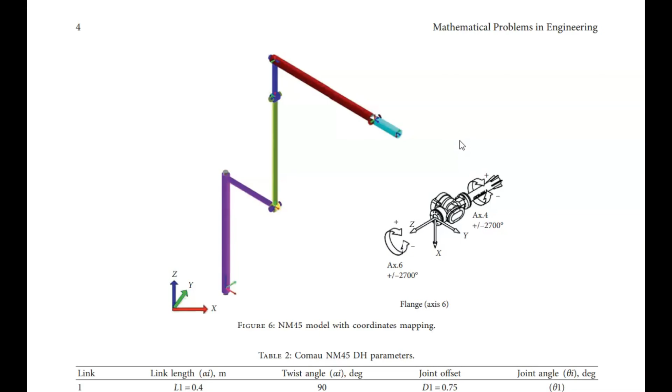If you've ever tried to study 6-axis robot kinematics before, or done a Google search on it, you usually end up looking at something like this that has some diagrams, some tables, gets into formulas, and before you know it you're looking at transformation matrices, and you just end up more confused than when you started. These are all usually written from the perspective of somebody who already understands it, so I want to try and make a video that explains it for the rest of us, at a beginner level.

So I'm a visual learner. I need to see the math, I need to see the problem worked out in front of me. So what I've done is I've put together this Excel spreadsheet where I have all the robot kinematics all worked out in front of me, and I can change the values and see everything change and see how the formulas all work their way through.

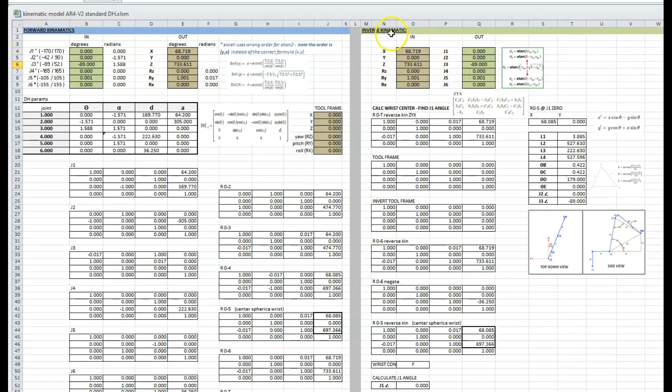So to illustrate the difference between forward and inverse kinematics, I have the AR4 control software open here, and then I have a camera set up on the robot so you can see it move.

The forward kinematics are when I know what the joint angles are, but I don't know what the Cartesian coordinates are for the XYZ, yaw, pitch, and roll position of where the end effector is out in space. So as you can see here, when I jog the robot using joint mode, changing the joint angles, the forward kinematics calculates out and tells me what the XYZ, yaw, pitch, and roll position of the robot is. You can see every time I jog it, the Cartesian coordinates update there.

Now the inverse kinematics is the opposite. That is when I know what the Cartesian coordinates are, but I don't know what the joint angles need to be to make that happen. So when I jog in the Z direction, for example, if we jog straight up, the inverse kinematic calculation is what figures out what the joint angles need to be to make that move happen. So every time I jog in Cartesian, you can see the joint angles updating. That is the inverse kinematic calculation that makes that happen.

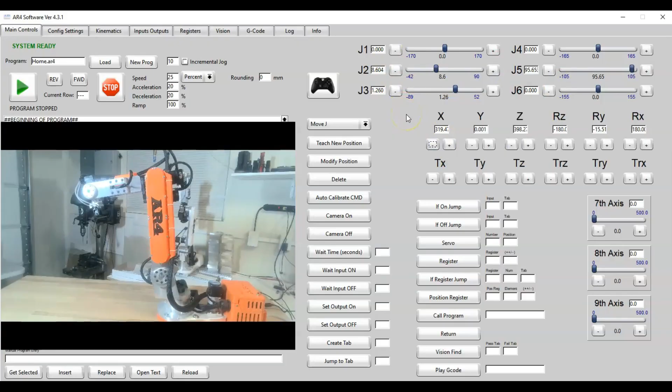So now that we know the difference between forward and inverse kinematics, I'm back on the spreadsheet here just to show you a few things and how the spreadsheet works. On the left side is the forward kinematics like we talked about before, and up here in these cells in green, this is where I can input the joint angles, and this will output the Cartesian coordinates.

So when I know the joint angle, for example on joint 2, if I change that to 20 degrees and enter that, it calculates through all of these transformation matrices and then spits out what the Cartesian coordinates should be.

Now on the inverse kinematic side, it's the same thing. You can input in what you know the Cartesian coordinates need to be. It will run through all these calculations and spit out what the joint angles need to be.

So to illustrate this, for example, I could take and copy the values from those fields and then paste in the values, and you can see it updates, and now it spits out what the joint angles should be. So you can see right here, J2 just updated to tell me that to achieve these Cartesian coordinates, joint 2 should be changed to 20, which is what we put in over here.

So now we're going to really get into the forward kinematics and how the forward kinematics works, and we'll do the inverse kinematics later towards the second half of this video.

On this side, for the forward kinematic calculations, you can see there's a lot of formulas here, a table of parameters, and a bunch of transformation matrices.

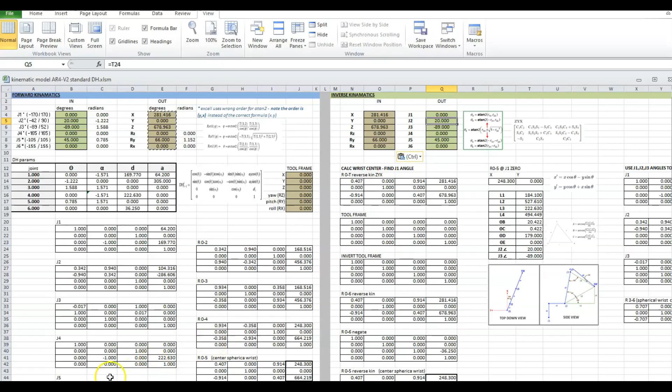Before we get into all that, let's talk about what we actually need to do to calculate the forward kinematics, to take each known joint angle and calculate where the end effector is in space.

We need to know the difference from where the base is to where joint 1 is, not only the difference in rotation but the difference in distance. Then we need the change in distance and rotation from joint 1 to joint 2, and the change in rotation and distance from joint 2 to joint 3, and so on.

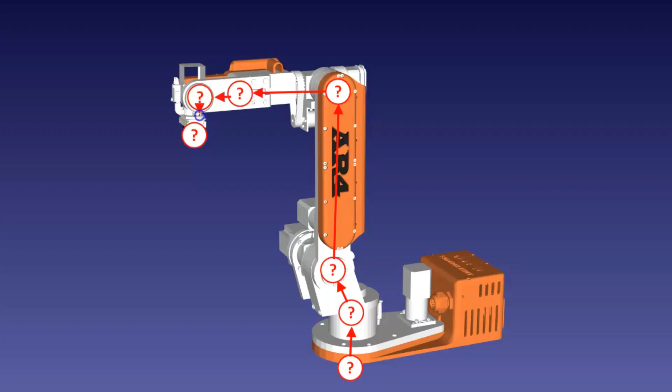So what we need is some type of mathematical representation of the change from the base to joint 1, the change from joint 1 to joint 2, and so on throughout the entire robot, so that we have a definition of the translation from one joint to the next.

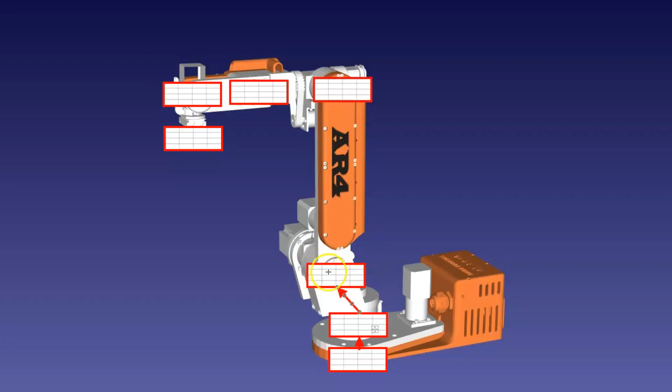That is what a transformation matrix is. This matrix defines the rotation and position of the base. The next one, for joint 1, defines the difference in position and rotation from the base to joint 1. Then this matrix defines the change in position and rotation from joint 1 to joint 2, and so on—each matrix defines the change from one joint to the next.

Once we have all these matrices built, we can multiply this matrix times this matrix times this one times this one, going through the entire kinematic chain, so that once we're done multiplying them all out, the last one gives us information we can extrapolate into the Cartesian coordinates of this position in space.

Now this sounds pretty daunting and complex, so we're going to take about three steps back and talk about some basics of rotation and translation.

When I reference a transformation matrix, or what's known as a homogeneous transformation matrix, this is a 4x4 matrix—a block of 4 rows and 4 columns where we place all our numbers. This is a notation, a form factor for linear algebra, that lets us do linear calculations on these numbers.

So this 4x4 matrix encompasses numbers that represent rotation and translation—that is, the yaw, pitch, and roll, plus the displacement in x, y, and z. The first three columns and rows in the matrix handle the rotation, and this is what's known as a rotation matrix.

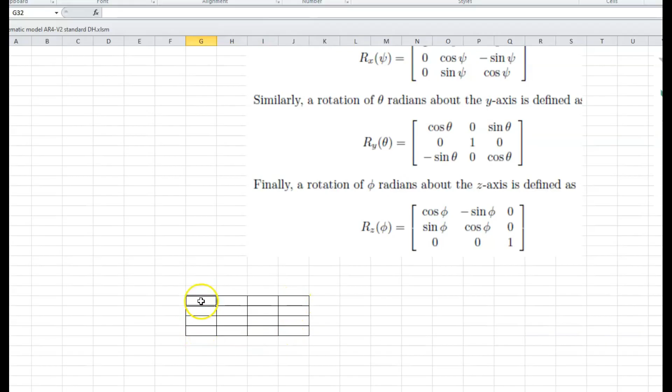When you think of rotation, you're probably used to Euler angles—the yaw, pitch, and roll. In linear algebra, a rotation matrix is just a transform matrix that allows us to perform rotation in 3D space.

This linear algebra or matrix format can be a little confusing. Linear algebra is a big topic, and there are a lot of websites that go over it, like betterexplained.com, which has an intuitive guide to linear algebra explaining how algebra means relationships, and linear algebra means line-like relationships. I'll put a link to this website in the description.

This article goes through some examples, gives equations, and explains how these linear calculations are done, and how they can be put into a different notation—a matrix notation—and how different operations can be performed across these matrices. It's a good article.

There's also, on Khan Academy, a lot of good videos—one on Vector Intro for Linear Algebra that explains how a vector can transform into the linear algebra matrix notation. So there's some good info out there to help you grasp the concept of linear algebra.

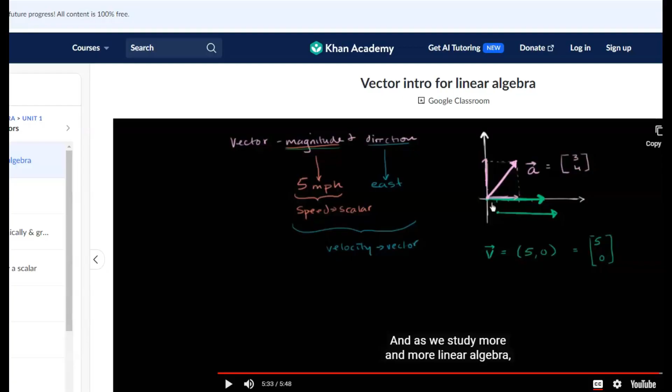In this example, we're gonna do 3 degrees for the Z, 10 degrees in the Y, and 5 degrees in the X. So before we can do this, we need to convert these to radians.

And so you might ask, well, what are radians and why do we use radians instead of degrees? Degrees are something that was more of a cultural thing, I'm not sure what the history is on how we came up with 360 degrees on a circle. There's a few different theories on that, but it's not a very mathematically sound way to define an angle. So we're going to use radians.

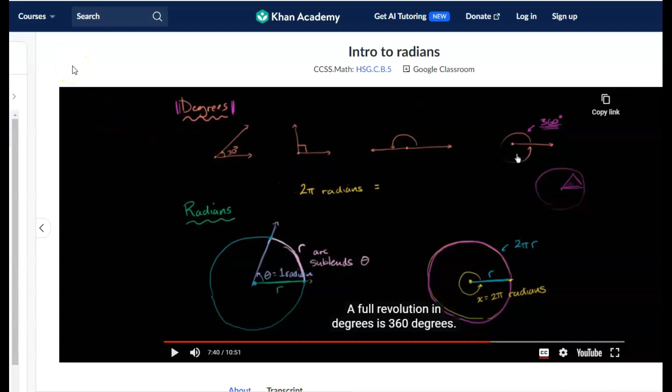So going back to our example, the first thing I want to do is convert 3 degrees to radians. So I'm just going to say that this equals radians of this cell. And so that's what the radians of 3 is, and then we can just pattern that down. So now we have the radians available to us for each of those angles in degrees.

The next thing we're going to want to do is take and pattern this formula over to where we're going to work this out. You'll notice that we have cosine, sine in these first 4 cells, and then these are zeros and ones. So we want to just pattern or copy that over. So I'm just going to put a 0, 1, 0, and a 0.

In this first cell here, I'm going to take the cosine of our Z angle, which is this. So we're just going to say equals cosine of 3 degrees radians, and that's our value for this one. This one, we're going to say equals negative sine of 3 degrees radians. For this cell, we're going to say that this one is equal to sine of 3 degrees radians. And this cell is equal to cosine of 3 degrees radians.

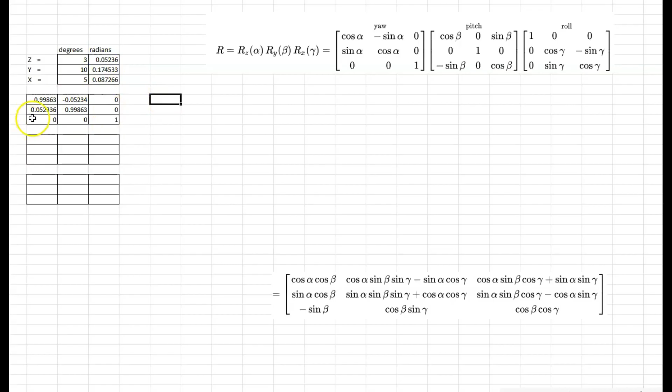So now we have a rotation matrix, and this rotation matrix represents in matrix form the rotation in Z of 3 degrees. So now I'll go ahead and do the same thing in these matrices for the Y rotation, and then the same thing for the X rotation.

Okay, so now I've finished filling in these last 2 matrices for the Y and the X, basically following the same thing we did on the first one. I just copied in the zeros and ones into each of these, and then applied the cosine and sine as shown here to these cells. So now I have 3 rotation matrices: this one for the Z angle of 3 degrees, this one for the Y of 10 degrees, and this one for the X of 5 degrees.

So now if we want to start working on creating a rotation matrix that encompasses all 3 rotations into one matrix that contains a complete rotation of 3, 10, and 5, of that complete rotation in one matrix, we can start with matrix multiplication. And what we're going to do is we're going to multiply the Z matrix by the Y matrix, and I'm going to put that right here in these cells here.

What that will give us is a matrix that represents the rotation of the Z and the Y, and then we'll take this matrix and multiply it by the last one, by the X, and then we'll put that here, and that will give us a matrix that encompasses or shows the complete rotation of all 3 angles right there.

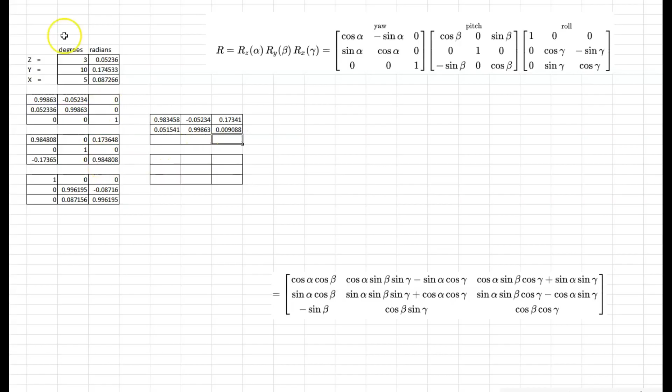This one is going to be equal to second row times third column plus second row times second column plus... Okay, so I finished filling in this bottom row here.

So you can see if we click on each of these, you can see top row, first column, top row, second column. Click on that, you can see it highlights top row, third column. Then we can look at the bottom one that I finished. Bottom row, first column, bottom row, second column, and bottom row, third column. So that is how you do matrix multiplication manually.

Excel has a formula for doing it automatically, and just like any other programming language, Python or whatever, is going to have a math library that'll do it for you. But I wanted to show you how it's done so that you understand it. So I can highlight a 3x3 space of 9 cells, and I can put in equals and then MMULT for matrix multiplication, and I want to duplicate what we did here just to verify that we did it correctly.

So I will highlight the Z matrix, and we'll put in a comma, and then highlight the Y matrix, and end the brackets. And then in Excel, for the matrix multiplication to populate all 9 cells, you have to hit Control, Shift, and Enter. So now we can look at it and we can see that it verifies that I punched everything in manually correctly. So I just wanted to show you that.

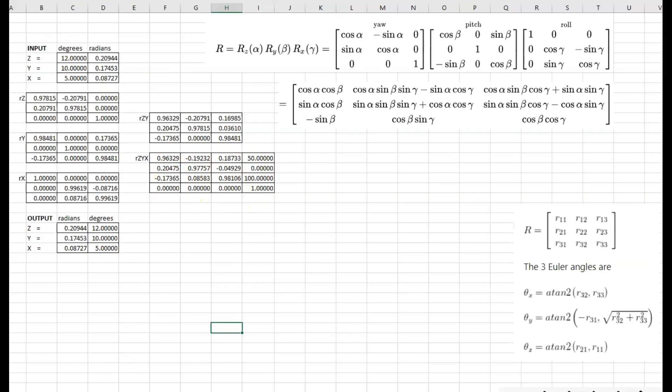So there's a little more to it. We'll come back to this, but I just wanted to point out that this is going to start to make a little more sense now that we're getting through what the transformation matrix looks like right here. So now let's talk about what it's actually going to take to create a transformation matrix for the robot. So we will need to create one for every single joint. So let's do an example of creating the transformation from joint 1 to joint 2.

So I've got my robot here. Let's say that this is my frame for joint 1 and this is my frame for joint 2. The z-axis is kind of hidden inside here for joint 1. So let's say that's our z-axis, and our y-axis goes along there, and the x-axis is pointing straight out. So in order to make the translation from this frame to this frame, I would have to rotate this frame 90 degrees about the x-axis to make these two match. So I've got a 90-degree rotation there.

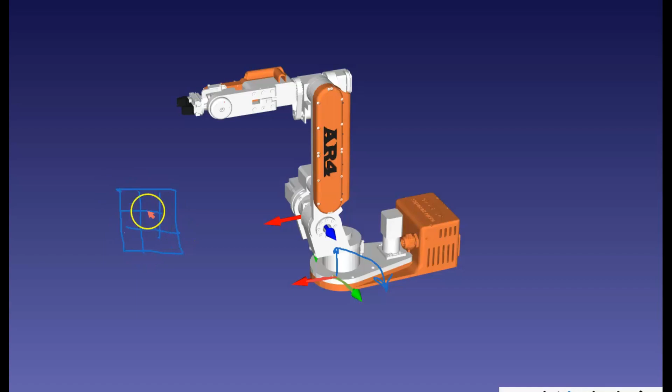So I would have to create a rotation matrix and put in all the values for a 90-degree rotation in the x-axis. And then, for example, our joint variable, let's say our robot moved 20 degrees on joint 1, then I would need to also create a rotation that indicated a rotation of 20 degrees in the z-axis. So I'd have to multiply those together, and then I would have an overall rotation of 20 in the z, 90 in the x. So let's say this is our rotation matrix, and then we would also make this a transformation matrix, adding the other cells that we need.

So let's say from our earlier example that the translation from joint 1 to joint 2 is 50 millimeters in the x, 0 in the y, 100 in the z, and then we'd add a 1, a 0, a 0, and a 0. And so that's how we would create a transformation matrix going from this frame to this frame. So we would have to do that throughout the entire arm. There's a bit of math in there; it takes quite a few steps. It takes 6 parameters to make that transformation. So most people don't do it like this. They use a shortcut called the Denavit Hartenberg parameters, and so that's what we're going to talk about next.

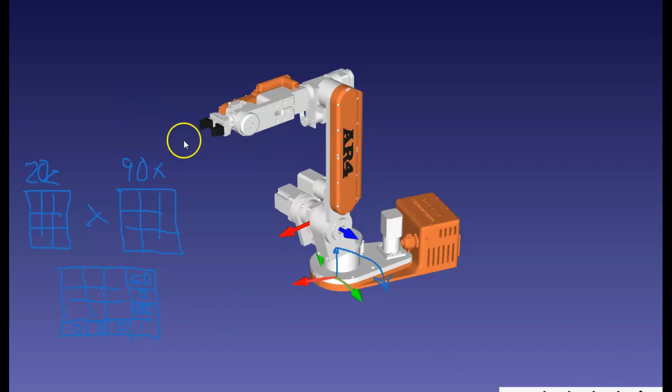So the Denavit Hartenberg parameters, or DH parameters, were created back in 1955 by Denavit and Hartenberg. And what these are is a shortcut or a formula to be able to create each of these transformation matrices a little bit easier, using only 4 parameters instead of 6. So the DH parameters are also used in conjunction with the DH table. So we've got a table here of 4 parameters per joint.

So before we get into that, there are 4 rules that you have to follow for the DH parameters to work. And these rules are: number 1, the z-axis has to be the axis of rotation. So if we look at our robot here, I'm going to use joints 1, 2, and 3 as examples. So in joint 1, the z-axis, the blue axis here, that is the axis of rotation.

On joint 2, the blue line there, that's the axis of rotation on joint 2. And the same thing on joint 3, the z-axis is the axis of rotation there on that joint. So the second rule is that the x-axis must be perpendicular to the z-axis in the frame that we are coming from and the frame that we're working in.

So looking back at our model here, the x-axis has to be perpendicular to the axis we're coming from and going to. So using joint 1 for an example, the x-axis has to be perpendicular to both the z-axis for this joint and for this joint. So you can see that by the x-axis coming out in this direction, that satisfies that rule, that it's perpendicular. And then you can see here on the next joint, joint 3, that the x-axis, by having it point straight up, it is perpendicular to both of the z-axis from both the joint that we're working in and the previous.

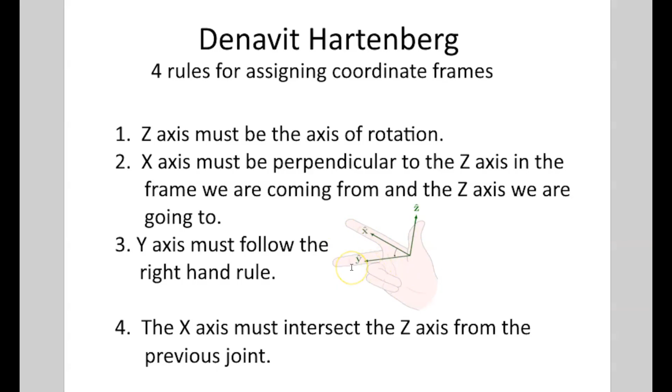The third rule is that the y-axis must follow the right-hand rule. So if you're not familiar with the right-hand rule, if you hold your hand in this orientation shown here, your thumb is the z-axis and the x is your index finger, then the y-axis has to be coming out in this direction to the left, as shown here by your middle finger.

So we can see here on the model, if the blue arrow going up is my thumb and the red arrow is my index finger, that would make my middle finger coming out to this direction, the direction that the y-axis needs to be. The same thing here, if this axis coming straight out was my thumb and this was my index finger coming straight out, then that puts the y-axis coming straight down. And then in this case here, if this was my thumb in this direction and this was my index finger pointing out, that puts the y-axis in this direction.

And the fourth rule is that the x-axis must intersect the z-axis from the previous joint. So if we look at the x-axis for joint 1, if we just do an imaginary line that goes to infinity in both directions, and then we look at the z-axis for the previous joint, and it goes to infinity in both directions, they do intersect right here. So they're on the same plane.

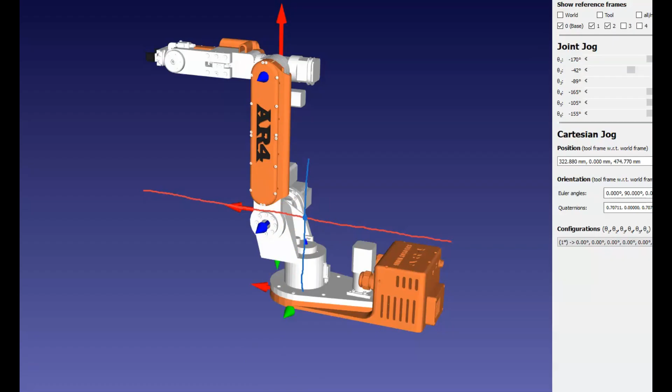Basically, the only time this really causes a problem is if you have an offset joint. If joint 1 was offset to one side, you would have to create your frame for your robot and define it with the frame offset so that these intersected, to satisfy the fourth rule of the DH parameters. So as long as we follow those 4 rules, we can set up our robot or configure our robot in a couple of different ways.

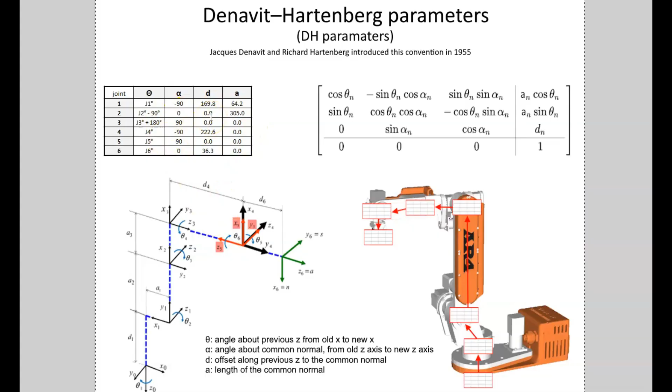I mean, not only are robots going to be different from one another as far as their size and the length of the arms, but you can also change the way that the joints are oriented to each other, at least as far as where 0 degrees is at, and some of the configurations. So, for example, if we open up an ABB robot, we can see that with all the joints at 0 degrees, the robot is in an L configuration.

But if we open up, let's say, a KUKA robot, you can see that with all the joints at 0 degrees, the robot is laid out flat like this instead of an L configuration. So KUKA has made their robot a little bit different as far as where 0 degrees is at. By the time you're done doing all the math, going through all the transformation matrices, you're still going to end up with the correct value at the end of where the end effector is. They just have a little bit different configuration.

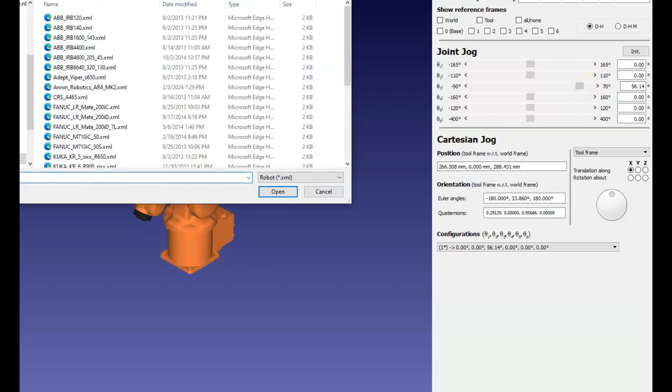Then, for example, if we go back to the ABB robot, if we jog joint 3 in the positive direction, that brings the arm down. Now, let's look at a FANUC robot, and we jog J3 in the forward direction, that brings it up. So they've defined their frame a little bit differently. So that's kind of an example of how you can still follow the parameters, but you can set up each robot a little bit different. So you will see tables that are set up differently.

So let's look at the table for the AR4. This first column, this is theta. So this is defined as the angle about previous Z from the old X to the new X.

So basically this is your joint angle, theta, this is your variable. So when you jog your robot, if you jog joint 1, this is the value that's going to be changed before you run the calculation on where the Cartesian coordinate is for that joint position.

You can see here that J2 is J2 minus 90 degrees and J3 is J3 plus 180. These make it so that with all the joints at 0, the robot's in the L configuration, same as the ABB robot we saw earlier. The KUKA will have different values - it won't be minus 90 and plus 180 here. There'll be different values added to or subtracted from the joint values for that particular configuration.

But that's what the theta column is, the joint angle basically. The alpha column is the angle about the common normal from the old Z to the new Z. If you remember in that previous example where we had to rotate the frame 90 degrees, that's what this is - how the main frames are rotated from one another, from the old Z to the new Z, about the x-axis. So in this case, from the base frame to joint 1, it's a negative 90 degree rotation, then 0, plus 90, minus 90, plus 90. Different robot configurations, depending on how they've set up the robot, these numbers could change some.

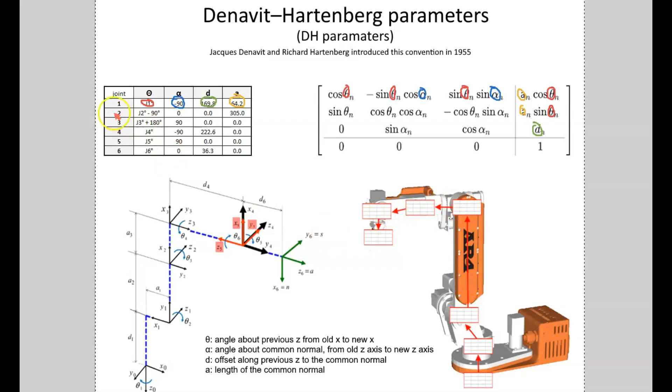And that basically creates our transformation matrix. So basically that's all there is to it, is just plugging these values in and creating each of the 6 matrices for each of the 6 joints.

Okay, so now that we've gone over how to create transformation matrices using the DH parameters, let's go back to our spreadsheet and go through the entire forward kinematic side. This entire side should now make sense to us. We've got our input up here, where we input what we want our joint degrees to be.

This column just takes that and transforms it to radians, so this whole column is just the radians of the cell next to it. In our DH parameter table, we've got our theta, or joint value, for joint 1, which is just grabbing directly the radians. The second one for joint 2 is grabbing this value minus radians of 90, and if you recall earlier, that's how we defined our frame setup for joint 2. Joint 3 is the joint 3 value plus radians of 180 degrees, just like we had here, and so on. Each of these just grabs the radian values.

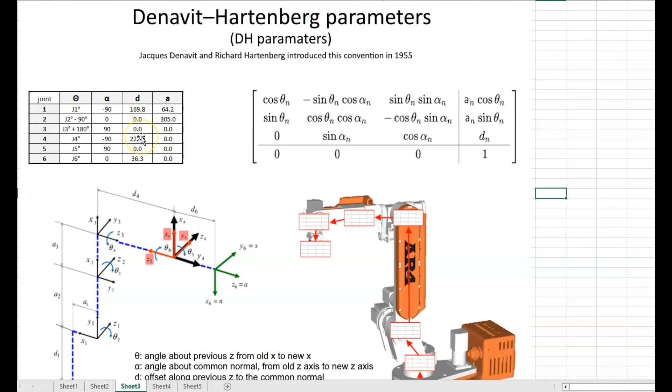Then for our alpha, this one is radians of minus 90, 0, plus 90, minus 90, plus 90, and 0, which is what we had here for how we defined our robot frames. And the D value and A value are link lengths, the same as what we talked about earlier here. So this is our DH table that we've built.

Now here we have our transformation matrices for joint 1. If we look at our formula, which I've got right here, it follows this formula all the way through, the same formula we looked at on this sheet. It's the exact same formula. For example, this first value is cosine of theta, same as we see there. This one is negative sine of theta times cosine of alpha, the same thing we have here. Every one of these is just an exact copy of this formula, grabbing the values from this first row for joint 1.

This one down here, joint 2, is the same thing — it just grabs the values for joint 2. Joint 3, joint 4 grab the values from the 4th line, and so on. So every one of these, 1, 2, 3, 4, 5, and 6, are exactly the same, following that formula.

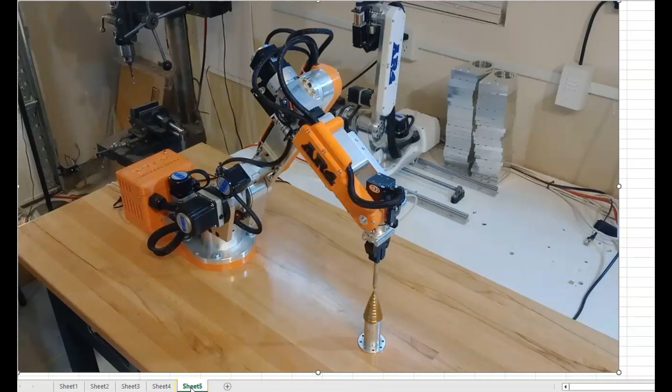Now what I haven't talked about yet is the tool frame. What I've created here is a tool frame. If you recall from the first scene in the video, the robot was articulating about this pointer. The tool frame lets you define how long your tool is, so you can do things like this. Tool frames are used in all kinds of applications — for weld guns to define where the tip of the welder is, glue applications for the end of the glue gun, and it can be anywhere you want in X, Y, and Z, pitch and roll, based off the frame of the end effector.

In this case, this one was 120 millimeters straight out in the Z direction, and that's all I did — defined my tool frame to be 120 millimeters. If we go back here, I basically created this tool frame manually, the same way we created this rotation matrix, and then turned it into a homogeneous transformation matrix. So these rotation cells, if we look at the first one, are the exact same formula as right here, following that same template.

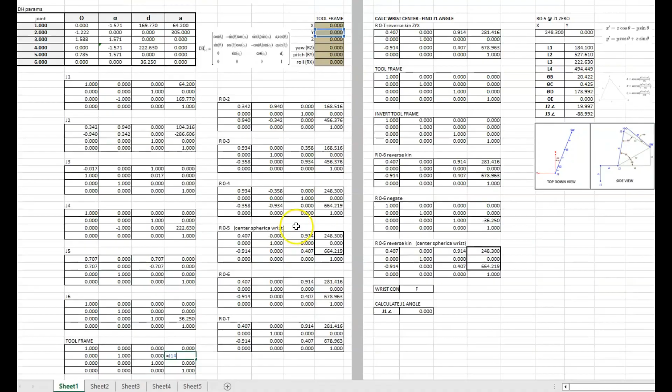And the inputs for these I put up here — this is my input for my tool frame. These are the input values it's looking at to create this. For example, the Z value is looking at the Z value here, and the Y value is looking at the Y input. So this transformation matrix is just manually created from this input right here.

So, for example, the tool we showed you right here — if I wanted to apply that, I'd come in here to the Z, put in 120 millimeters, and then if we look at our tool frame, we've got 120 millimeters. Basically, this tool frame just stacks one more transformation onto the end of our robot to tell us where the very tip of that tool pointer is. So we've got all 6 joints, plus an extra transformation matrix to tell us where the tip of our tool ends up.

So now I have 7 transformation matrices, and all we do is multiply those through each other. This first one, R02, is joint 1 times joint 2. The transformation matrix for R03 is R02 times joint 3, and the product of that times joint 4 gives us R04. R05 is R04 times joint 5. So you can see all we're doing is multiplying the product of the previous multiplications times the next joint.

R06 is R05 times joint 6, and then R0T, our last one, is R06 times our tool frame. So this frame is our final output, the last frame that tells us what we want to know.

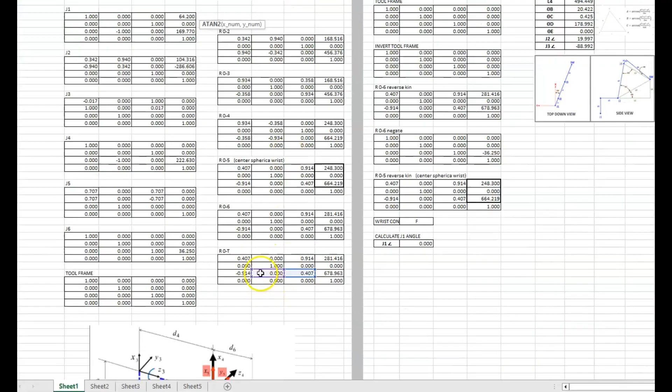Then we have this formula for extracting the yaw, pitch, and roll in degrees from that frame. This ATAN2 goes through and grabs ATAN2 of those 2 cells. The rotation in Y grabs the ATAN2, and this same formula grabs it from those 3 cells from the rotation portion of that matrix. Then this ATAN2 formula grabs those 2 cells from this portion of the rotation matrix and presents the radian values, and then converts those to degrees, telling us the final degrees of where the robot is at.

So that completes the forward kinematics and how the forward kinematics on the robot works. So just a quick recap here.

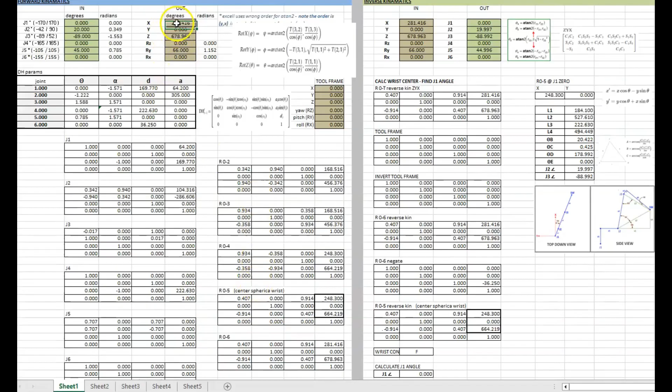We've got our DH table that defines basically what our robot looks like. Those values are run through this formula to create each of these frames for each joint, all the way down through the tool frame. We multiply this one times this one to get this one, and this one times this one to get this one, and so on all the way down until we have a final transformation matrix. Then we extract the XYZ and use those formulas to extract the yaw, pitch, and roll from the rotation portion of that matrix to spit out what the final values are.

And again, to recap what the forward kinematics do: when I set these joint values, this is how the software figures out the XYZ, yaw, pitch, and roll positions of the robot.

So in the next half of this video, we're going to go over the inverse kinematics, or reverse kinematics. That is where we know what we want the X, Y, and Z to be, but we need to figure out what the joint values are, so we'll do that next.

Now let's talk about the inverse kinematics, or reverse kinematics, of the robot. On the spreadsheet, on the right-hand side where we've got the green bar across the top, this is where we've done all of the inverse kinematic calculations. These cells are where we input what we want our Cartesian coordinates to be. It'll run through all the calculations and spit out what the joint angles need to be to achieve that. So this is our input on the sheet, and this is our output on this side.

Now, there are a couple different ways to do inverse kinematics: a geometric method and an algebraic method. We're using the geometric method. I think that's the simplest and easiest to understand.

Keep in mind that this calculation is the simplest form of geometric calculations, and it's based on this robot's configuration, with all joints at 0 and the robot in an L configuration, so that's what this is written for. The kinematics can get a lot more complex when you're putting in conditions for different robot configurations and things of that nature.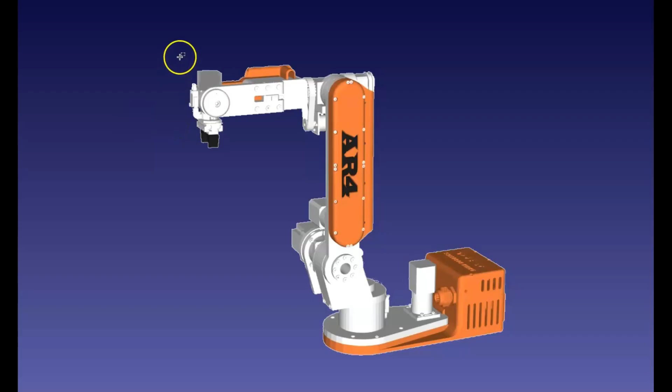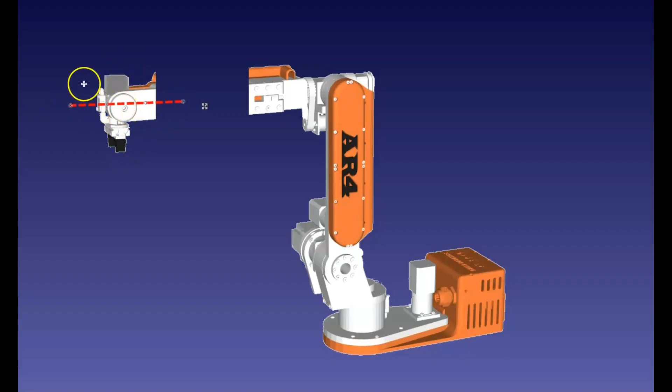The concept here is that mathematically, we're going to take the robot wrist and detach it from the robot. On the wrist we have 3 axes: axis 4 spins along that axis, axis 5 spins along this axis, and axis 6 spins along that axis. All 3 of these joints intersect in one spot in the center, and that's known as the spherical wrist. That's the center of J4, J5, and J6.

These 3 joints provide all the orientation for the end effector. If we imagine the spherical wrist is out here somewhere, and we look at the configuration from the spherical wrist back to joint 3, from joint 3 back to joint 2, and from joint 2 back to the offset and joint 1, more or less what we end up with is a triangle. These 3 joints primarily dictate position in the world. So joints 1, 2, and 3 dictate position, and joints 4, 5, and 6 dictate orientation.

This allows us, from our Cartesian point in space, once we figure out where the spherical wrist is, to run some trigonometry against these lines and figure out pretty easily what joints 1, 2, and 3 are. Then from there we can work backwards to figure out what the orientation of the wrist is.

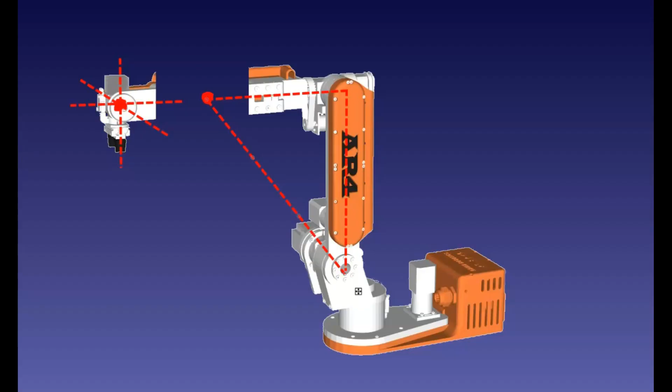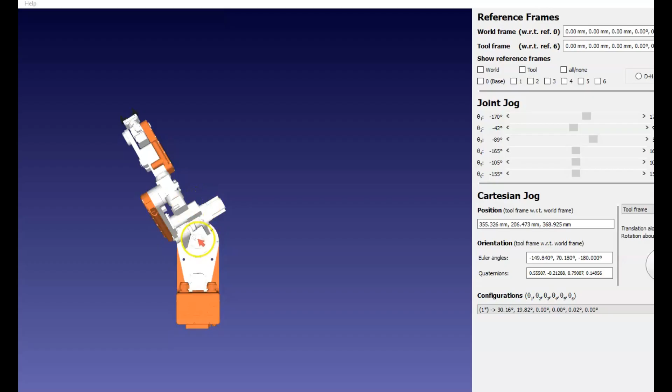Let's say we want to start with joint 1 and figure out what the joint 1 angle is. Looking at a top-down view from the robot, let's say joint 2 is leaning forward about 20 degrees, and we want to move joint 1 about 30 degrees, and figure out that angle from the geometry. We look at the axis from joint 1 over to where our robot is, to figure out the angle of joint 1 — going from our end effector to right here is the angle we want to find.

But what I want to illustrate is if I jog joint 5 down and move joint 4 over, now my end effector is over here, and I'd actually be getting the wrong angle. That's not truly the angle of joint 1 — it's the angle of joint 1 plus the offset of how our wrist is oriented. That's one reason we need to figure out where the center of the spherical wrist is before doing any calculations, so we get the angle from the spherical wrist over to our zero line correctly.

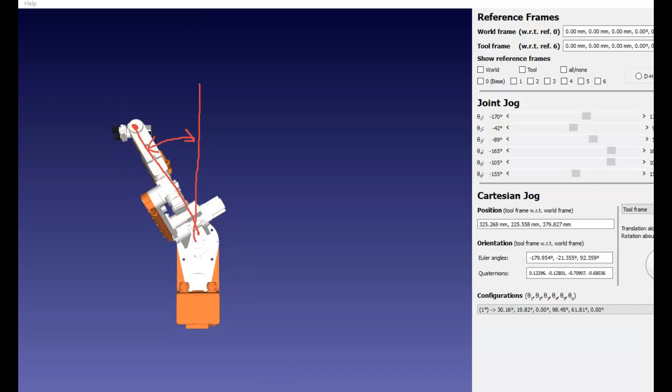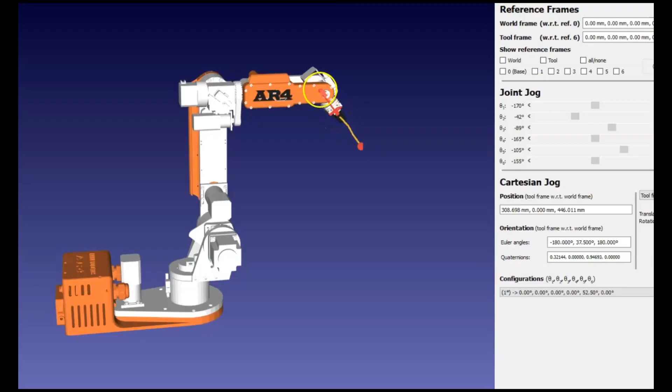So we need to figure out where this spherical wrist is. We have the XYZ, yaw, pitch, and roll for where the end effector is. Let's pretend we have a tool attached to our robot, like a pointer or a weld gun. The kinematics — the XYZ, yaw, pitch, and roll of the robot — is right here, and we need to work backwards up to the spherical wrist to figure out its XYZ, yaw, pitch, and roll. We work from the end of the tool back to the end effector, and then from the end effector back to the center of the spherical wrist. Once we get to that point, we can start calculating joint angles for joints 1, 2, and 3.

So now we're back on the spreadsheet looking at the inverse kinematic side, and we need to work our way back from the end of the tool back to the center of the spherical wrist. So what we know right now is the XYZ, yaw, pitch, and roll of where the end of the tool pointer is. The first thing we want to do is turn this into a transformation matrix.

Looking here at this first one, this is R06 plus T plus the tool. We're going to build this rotation section first, just like we went over in the first half of the video where we learned how to create a rotation matrix from the yaw, pitch, and roll. We're using this exact same formula here, and I have a copy of it right here. This is the same formula from earlier.

So we're just going to plug all these numbers in, the yaw, pitch, and roll, into this formula and build this rotation. This will give us, in matrix format, the rotation of where the end effector or the tool currently is. Then we simply copy in the x, y, and z values, directly linked. So we have the x, the y, and the z values, and then, like before, 0, 0, 0, and 1 to complete this transformation matrix.

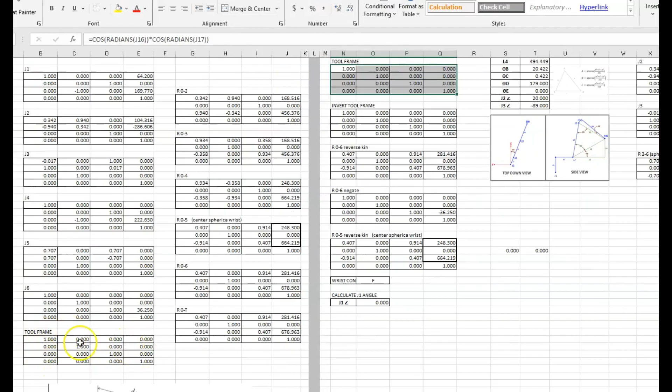This is exactly the same as what we looked at earlier on the forward kinematic side. This tool frame is exactly the same thing. I just thought it would be easier to follow if we had it in both places so that we could follow the math all the way down through.

So this is simply just a tool frame, and if I put in a value up here on the input, it's going to affect and manipulate this frame or this transformation matrix the same as before. So if I was to put in 100 in the Z, you can see it puts in 100 in the Z, and so on. So this is just our tool frame, and now since we're working our way backwards from the tool frame, we need to be able to invert that tool frame.

So we need to create an inverted version of that tool frame. One thing to keep in mind when creating an inverse matrix is that when you multiply the original matrix times its inverse, it should equal the zero rotation or the identity matrix, and that's what it already is because I don't have any values in here.

But if I was to give the z value some value, you can see the z value is negative 100 on this frame and positive 100 on this frame. So if we're to multiply this frame by this frame, the output should be the identity matrix or a zero rotation matrix. So that's something to keep in mind when you're inverting a matrix.

There's a lot of software tools out there to handle creating an inverse matrix. To actually invert a matrix manually is very mind-numbing; it would take about an hour-long video to go through, and there's a couple different methods for doing it. But given that this isn't just a standard 4x4 matrix in linear algebra—this is actually a transformation matrix with a rotation portion and a displacement portion—there's a trick or shortcut to quickly turn this into an inverted version of this matrix up here.

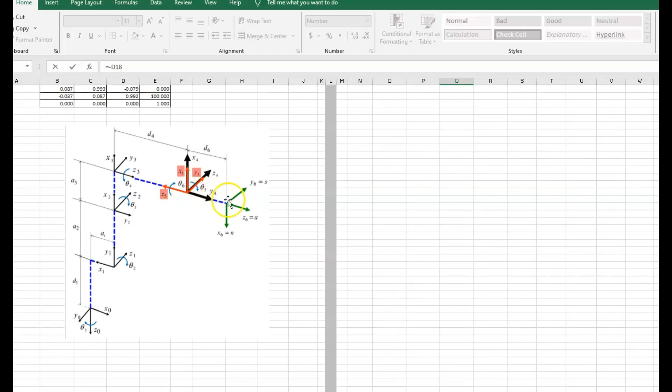So this D value, this D 36.25, if we go back and look at our model right here, this D6 value is the value that goes from the end of our end effector back to the center of the wrist there. So that's what we have right here, is that value negated. We've got a negative

36.25 on the Z portion of this, and then for our final transformation matrix, that is just the previous R06 frame. This is the frame we got after we went backwards from the tip of the tool back to the end of the joint 6 end effector, and then we multiply that times the negation of that arm length, and that's what gets us to the center of the spherical wrist. So this frame now represents the center of the wrist. This XYZ, this is the position in space where that is.

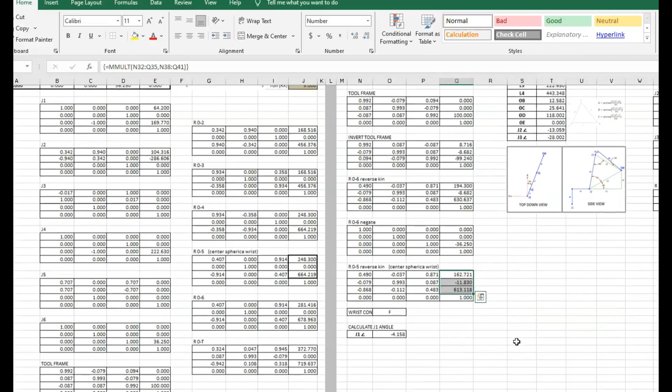And so now we can start working on calculating our joint 1 angle. So that's the next thing we're going to do. So now to calculate the joint 1 angle, we're going to refer to this little diagram here for the next few steps for calculating joint 1, 2, and 3. For joint 1, you've got this top-down view, so we're going to use the atan function to get this angle here. So if I click into this cell, you're going to see a bunch of if-and statements.

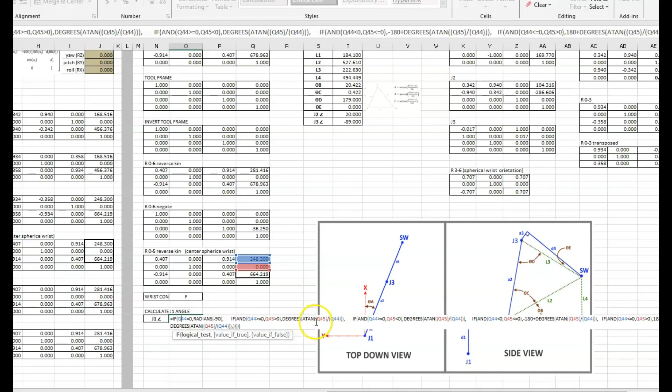Doing if-then statements in Excel is a little bit messy. You have to do if-ands and then stack them up, and it gets a little bit crazy. But anyway, what this is doing is it's just the same formula. It's just looking at a couple different conditions. It's just taking the atan of the y divided by the x to get that angle.

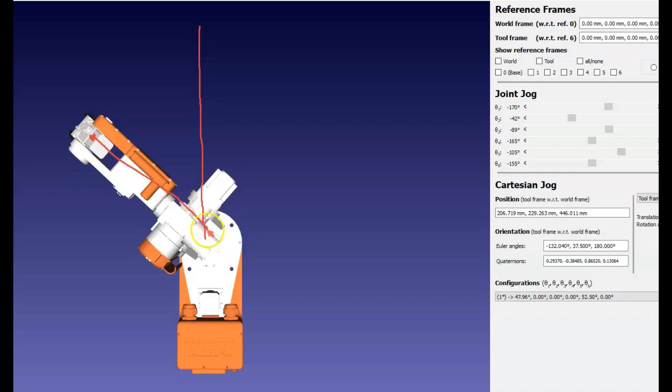So if I look at a top-down view of my robot, and this is my 0 line going straight up, and then let's say that I've jogged my robot some amount of degrees in this direction, and I run that function, the atan of y divided by x from this position in space, it's going to give me this angle here, which is what I want. But if I, for example, jog the robot past 90 degrees, then the 0 line keeps going. It's going to give me this angle right here. It's going to give me the wrong angle.

So what that series of if-then statements says is just if the coordinates are beyond 90 degrees, then take 180 degrees and subtract this from it to give the correct angle for J1. So that's what those if-then statements are about there.

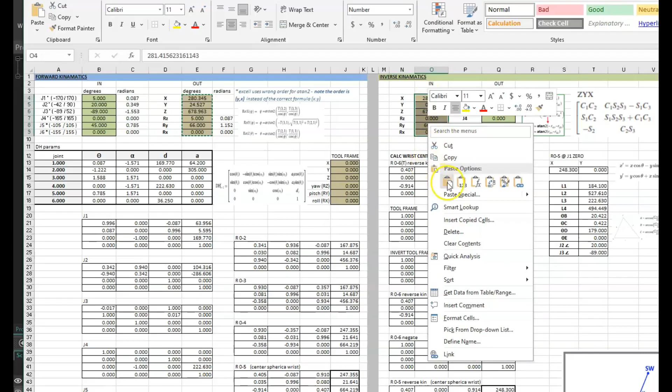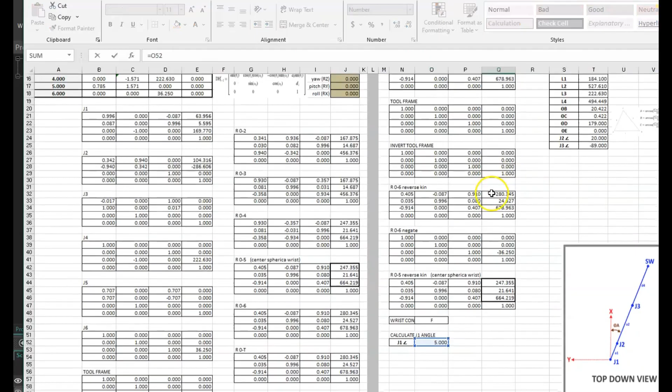So just to show that this works here, if we go back up and let's say we put in 5 degrees for our J1 value, this is our Cartesian coordinates, so let me copy those and then paste the values back over to this side, and you can see it's going to run through that whole calculation, figure out where the XYZ is of the spherical wrist, run that atan function to return the degrees of that position. So now we have 5 degrees, and then that just gets transposed directly up to this, that's just looking directly at that cell right there.

So now that we know the angle of J1, we can move on to calculating joints 2 and 3. So if we look at this diagram, the rest of these calculations are going to be done from a side view. We know the X position of this point out in space, and we know the Z position. We know the X, Y, and Z. So basically the ones that matter here are the X and the Z of where the spherical wrist is in space. Now I know what this offset value is, and I know the X position, so I can start figuring out all these link lengths and angles.

L1, L2, L3, and L4, these are all lengths that we're going to figure out. Those lengths will help us then calculate out some angles using trigonometry, and then we can figure out where the joint 2 and joint 3 angles are at based on all of this. So something I wanted to point out here when we're looking at a side view of the robot, we're going to be basically figuring out a number of triangles to figure out what this angle value is and what this angle value is.

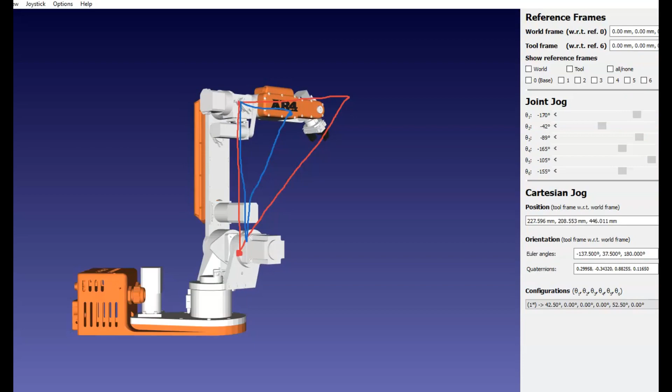The problem is that if I were to jog joint 1 away, now none of those angles are going to be correct anymore. So that's the point I want to make, is that the robot mathematically needs to be back at 0 for joint 1. So we're looking at a perfect profile of a side view to make these calculations. Since I've already figured out what J1 is, I don't really care about J1 anymore. So now I want to put J1 back to 0 for the remainder of these calculations.

So mathematically, that's what we're going to do. We're going to force J1 back to 0 so that we can run the rest of these calcs here. And the formula for that, I have right here. This is the new X value. If I put X back to where it was, the X value is going to be X times the cosine of theta minus Y times the sine of theta. So if I look in the cell, that's the same formula right here, where we're looking at the X and Y values of the spherical wrist and factoring in the joint angle to essentially move

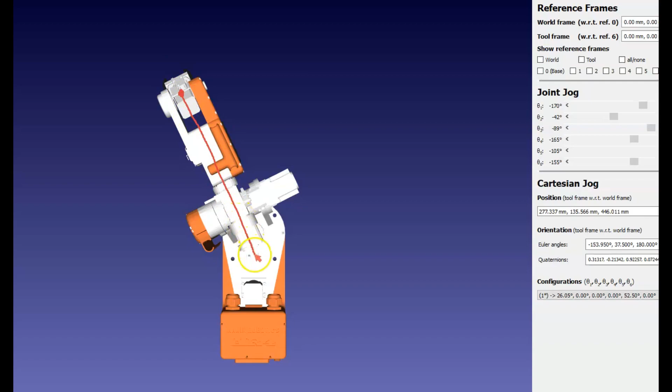it back. So essentially from a top-down view, let's say that joint 1 is at some degrees here. Here's the center of our spherical wrist, and we want to put joint 1, at least for these calculations, back to 0 so that we can basically be looking at a profile view when we run the rest of those trigonometric functions to get angles 2 and 3. So that formula on the spreadsheet is going to take this point and put it back. It's going to rotate it around the axis and put it back to 0.

On our spreadsheet it was 5 degrees. This is more than 5, but it's going to take that 5 degrees, and then take the X and Y positions and move them back. Z doesn't matter. Z is going to stay the same, so our height's not going to change. More or less all we really care about is the X, but that formula is going to move the X and Y and rotate them back to 0. So mathematically, we're just setting joint 1 back to 0 degrees so that we can run those calcs.

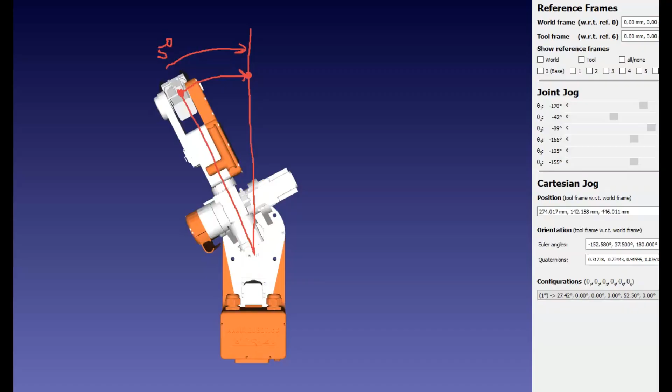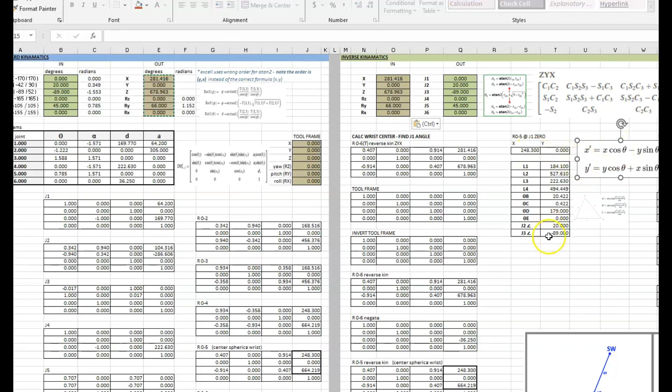So right here, this is what the X would be if joint 1 was not at 5 degrees. If joint 1 was at 0, it would be 248.3, not 247.35. To illustrate that, we can come over here and put joint 1 back to 0. That'll give us these Cartesian coordinates. We'll copy that and paste the values back in, and now joint 1 should be at 0. And you can see now they agree. The calculation on the spherical wrist shows X at 248.3, which is what we had before when we used this equation to mathematically force it back to 0 degrees.

So now we're going to go through this diagram and start calculating these lengths to help us get some of the angles that we need. The first one is L1. You can see right here is where we're calculating L1. That is our current X position, which is how far over we are, minus the shoulder offset A1. Then let's jump forward and look at the L4 length. The L4 length is simply the Z height of the spherical wrist, which is our Z height minus the D1 shoulder offset. So that's how we get L4.

Next, let's jump back up to L2 to see how to get that length. That's just the hypotenuse of a right triangle, so it's the square root of L1 squared plus L4 squared. And the last length that we need is L3. L3 is basically the same thing again, the hypotenuse of a right triangle. We've got the D4 and the A3 values there, so L3 is just the square root of the sum of those two arm lengths squared.

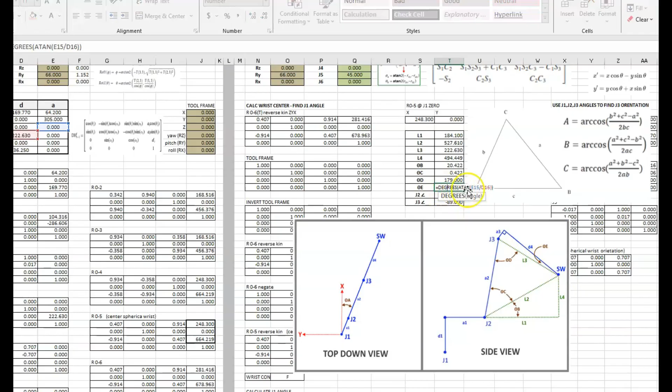Then we have theta d, that's our next angle we want to figure out. So if we look at that one, theta d, that formula is just following this formula here to get that angle right there. And then next we have theta e, that's this angle right here. And again, that's just a right angle triangle. So that's just taking the atan of the base divided by the altitude of that triangle, which just ends up being the d length and the a offset of the arm lengths of our robot.

So then after we get all of those figured out, then we can actually figure out what the angle is for J2. So if we look into this cell, we've got some if-then statements nested in there. And basically what that's saying is that if the spherical wrist is forward of J2, then J2's angle is going to be theta c plus theta b. Otherwise, if the spherical wrist falls back behind J2, then it's going to be the inverse of that.

And then also if the spherical wrist is above J2, if it's up in the air where it's shown here, then it's going to be theta c plus theta b. Or if the wrist drops down below, if the robot is reaching far forward, then it's going to be theta c minus theta b. So that's how we get our joint 2 angle.

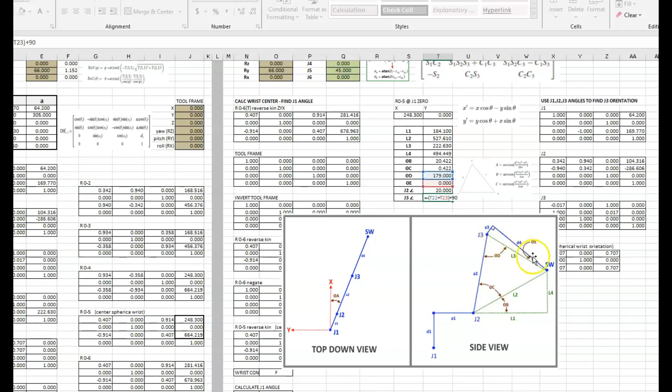And then lastly, we want to get our joint 3 angle. So if we look at that, that is basically just theta d plus theta e. Since some robots have an A3 offset or a shoulder offset from joint 3, the D4, the actual arm length of the robot, is raised above and not at the same angle as L3. So you have to add theta e to theta d to get the correct angle for the J3 arm, where that arm is actually at.

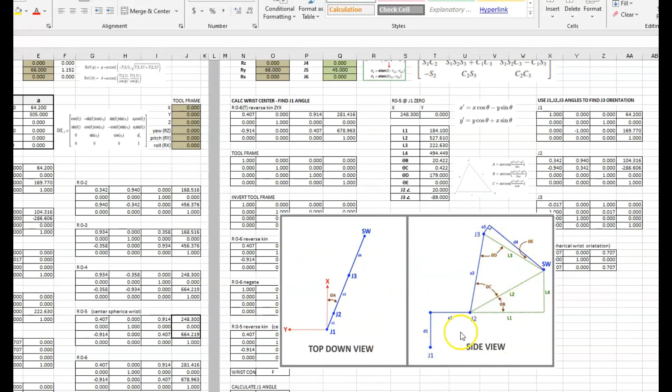So before we move on, I did want to point out that this is the most simple form of the geometric method of finding the joint angles for joints 1, 2, and 3. I would point out that this robot and this set of calculations on this spreadsheet do not have calculations for an elbow back configuration. And what I mean by that is if you look at joint 3, the AR4, that's as far back as just going vertical.

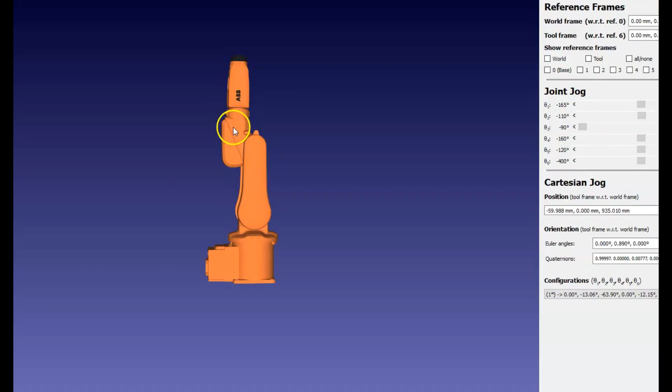If we look at some other robots, let's say we load an IRB-120, an ABB robot, that one also, I believe, doesn't really have an elbow back configuration. The robot just goes straight up. But let's load a different robot. Let's say an IRB-140. That one should have an elbow back configuration. So what that means is it goes vertical, but then it keeps going. So you have an elbow back configuration.

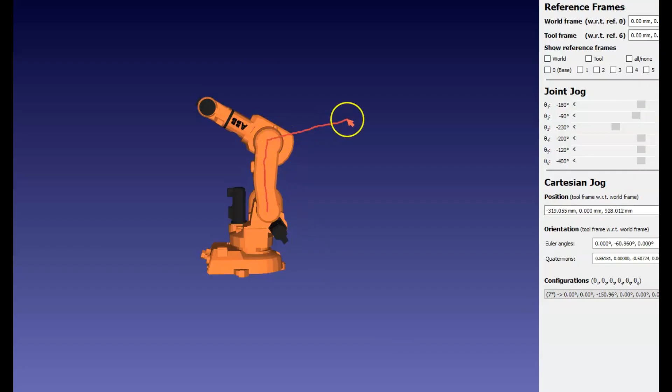So, when we did all of our calculations, we were doing triangles and doing calculations in this direction. If we had to start adding conditions to be able to go the other direction, there's a whole other subset of calculations we would have to do for elbow back. And that also brings into play a joint singularity, and I'll talk about that a little bit later when we get to the wrist. But in general, a singularity is when a joint has to cross over 0 when it can get to the same point from two different configurations.

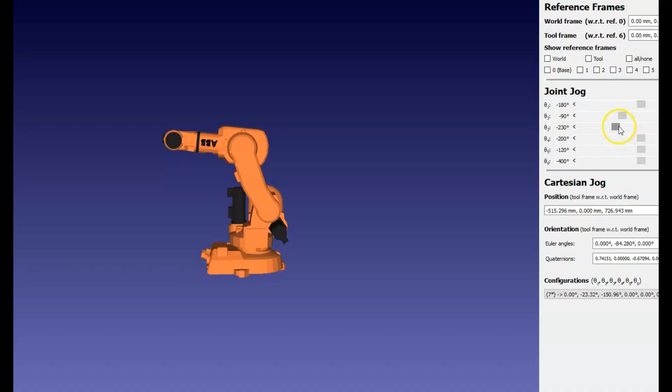So, for example, turn off my pen here. If, let's say, joint 2 is back and joint 3 is forward, then I could reach this point in space right here.

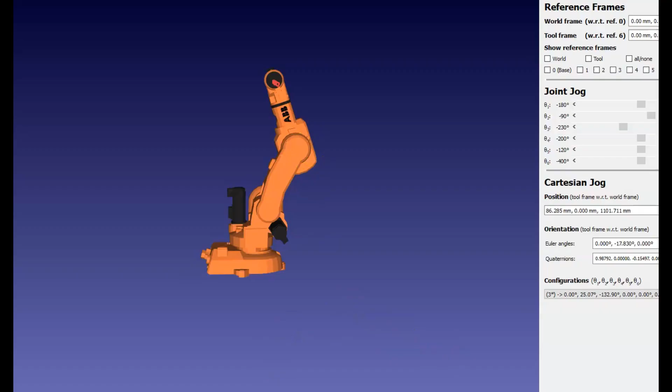But with an elbow back configuration, I could also take and put joint 2 forward, and then with elbow back I could bring joint 3 back, and I can get to the same position in space but in a different arm configuration. This brings in some math issues because some of the mathematics becomes ambiguous, and then you have to have a configuration value assigned so the controller knows which configuration you want the robot in. But we'll go over that in a few minutes when we talk about wrist singularities.

Okay, so now that we've finished calculating joints 1, 2, and 3, we're going to get into how to calculate joints 4, 5, and 6, which will be the wrist rotations. That's going to give us our orientation in space with a spherical wrist. So now we want to figure out the angles for joints 4, 5, and 6.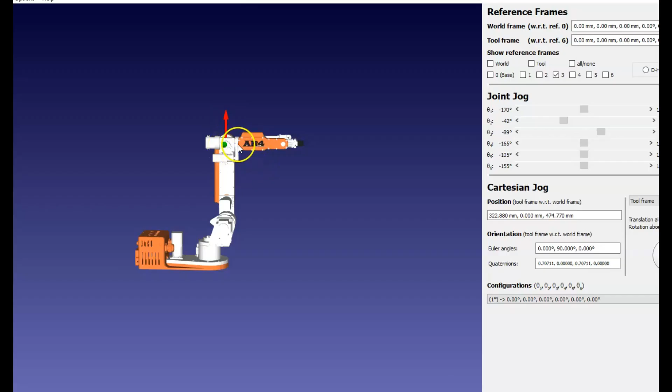Keep in mind that now that we've figured out the joint angles for joints 1, 2, and 3, that is going to dictate where the spherical wrist is in space. So for example, this frame up here, we now know where the frame is for joint 3. Keep in mind that even though the frame for joint 3 is back here, that might not be as intuitive, since this entire arm rotates at joint 4. Essentially joint 5 and joint 6 together represent the spherical wrist way out here, while technically the frame for joint 3 is way back here.

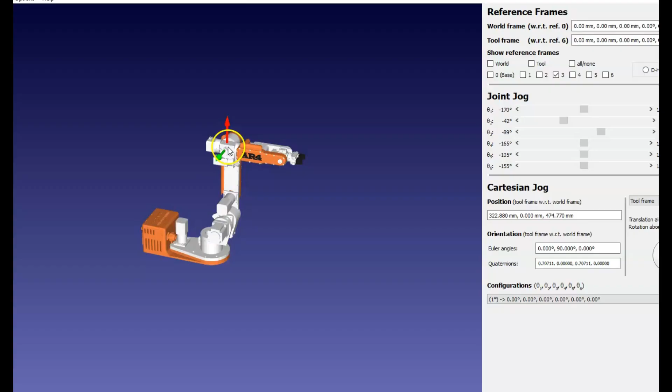But regardless, joint 1 is going to manipulate that frame for joint 3, joint 2 is going to manipulate that frame, and joint 3 is going to manipulate that frame. So any one of those three joints dictates where this wrist gets reconnected to the robot.

If you recall previously, in our minds, or mathematically, we disconnected the wrist so that we can take joints 1, 2, and 3 and figure out where that point in space is that the wrist goes back on. So there's a frame here, and a frame out here on the end of it, and we have to reconnect the wrist to that frame so we know where the wrist is in space. That's what we have to do next.

So to figure out where that frame is in space for the end of joint 3, where we're going to reconnect the wrist, we need to do what we did on the forward kinematics and create transformation matrices for joints 1, 2, and 3 so that we can multiply them through to figure out exactly in space where joint 3 ends and where the wrist connects to it, so we can figure out those angles.

Now, what I've done here is I've created a transformation matrix for joint 1, joint 2, and joint 3. Since we've solved for what joints 1, 2, and 3 are, I can take these values and apply them to the DH parameters and basically do the exact same thing we did on the forward kinematics for joints 1, 2, and 3. So if we go over and look at the forward kinematics for joints 1, 2, and 3, multiplying frames for joint 1 times joint 2, and then the product of that times joint 3, to come up with R03.

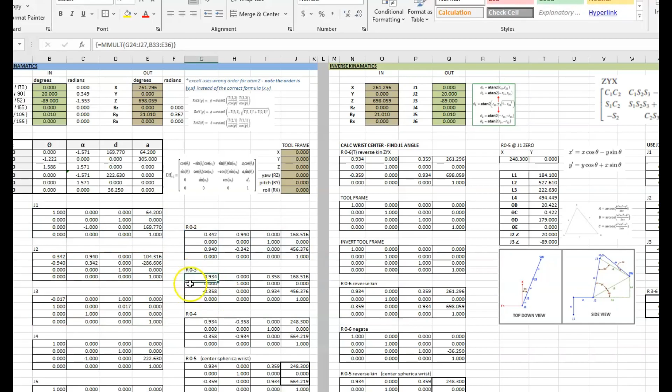That is exactly the same thing we're doing over here on this side, only I'm not getting joints 1, 2, and 3's values from the input. I'm getting joints 1, 2, and 3's values from our calculation that we just did. So that's what we have here. This is just the DH parameters using these inputs to put together the transformation matrix for joint 1, 2, and 3. This one here is joint 1 times joint 2, and this one here is the product of that times joint 3.

So now I have a frame that represents where this joint 3 frame is out in space. So now I have a target — I know where I'm going to reattach the wrist at. So now the problem is that I have a frame out in space with a rotation for joint 3.

So if joints 1, 2, and 3 are all jogged to some angle, this frame is going to be at some rotation. And then I also have my overall rotation, which basically includes this. So I have to stack these together somehow — I have to merge the overall rotation, which is basically this rotation frame here, with this frame here. So what I need to do is set this back to 0. Basically, I need to be able to figure out what its inverse is.

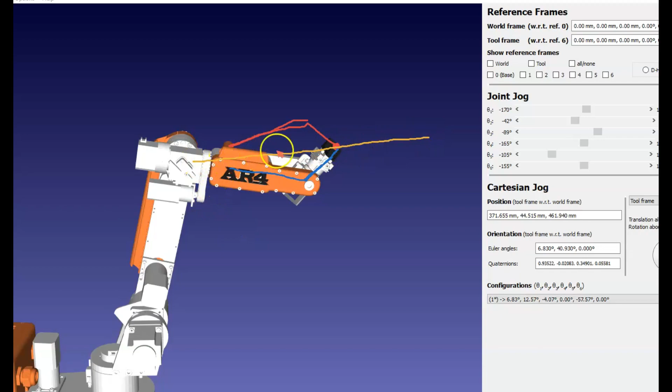When joints 4 and 6 are passing through this point, let's imagine joint 4 and joint 6 become perfectly in alignment — that creates a singularity where the math is infinite. It can't solve for what the rotation is from joint 4 to joint 6 when they're perfectly in a line. So that creates a singularity, and the math is also ambiguous. This rotation frame cannot tell you whether joint 5 is up or down. It's a mathematical problem.

So that's why on this little diagram it says theta 5, with a plus or minus, meaning that if joint 5 is positive, you use these two calculations to get joints 4 and 6's values, or if it's negative, you use this other formula. This brings into play a robot configuration — a value that when you teach a position, you stack on a number that tells you which direction your singularities are going in.

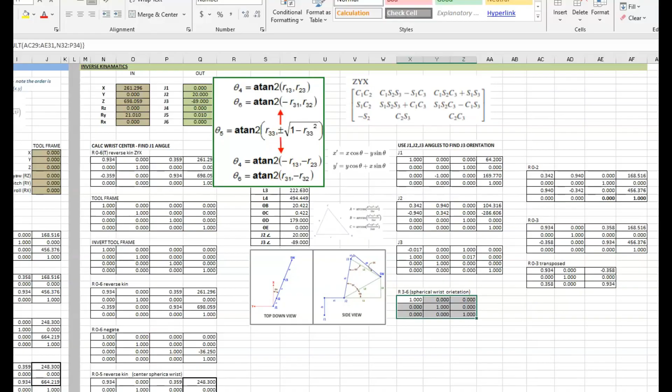So to illustrate that, I've got the AR4 software open, with the robot at all axes at 0 except J5, which is tipped in the negative direction. If I teach a position, it will teach it with the yaw, pitch, and roll, but adds a configuration — an N configuration — to the end of the move. Then if I jog joint 5 to the positive side and teach a position, it now adds an F to the end for the flip configuration. That's an example of the configuration added to the end of the move to signify the wrist's configuration for that move.

Now, most robots, when you're jogging and try to jog through singularity, once axis 4 and 6 come into straight alignment, it'll throw a singularity error, and then you'll need to jog joint 5 just to get on the other side of singularity to continue moving.

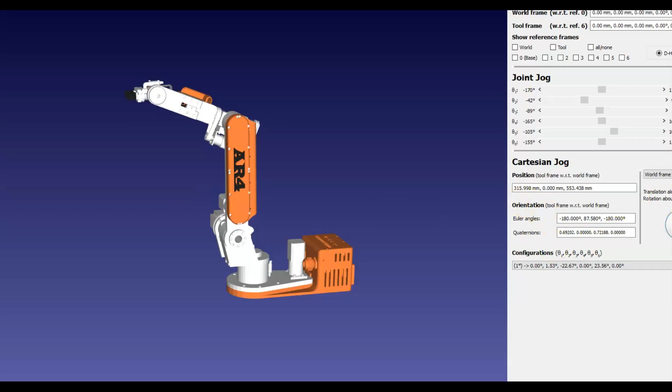This simulation software uses Marlin open source kinematic code, which is a little bit more advanced and has some methods to get past singularity, as do some of the more expensive robots. But I just wanted to point that out regarding what singularity is and what robot configurations are.

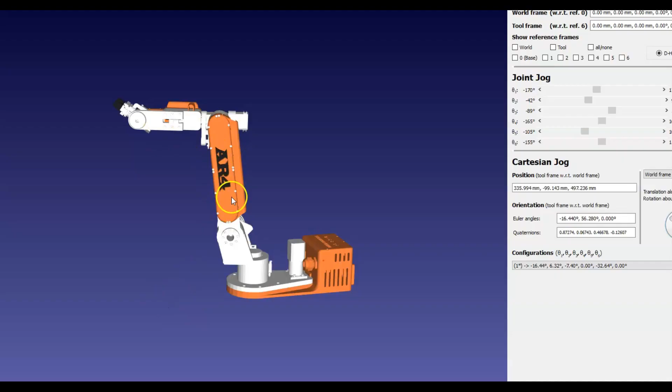Now, most robots have more than one configuration. The AR4 does not have an elbow back configuration, so I didn't have to worry about adding one for the elbow, and joint 1 doesn't go beyond 360 degrees—the robot just goes all the way around. But robots that can keep spinning on joint 1 will also have a singularity or configuration for joint 1. So a lot of times there are 3 configurations on a robot, whereas the AR4 only has 1. I didn't really see a need to do an elbow back; it just creates issues with a wiring harness. The only time I've had to utilize an elbow back configuration is with inverted robots, for example doing water blast applications and things like that.

To show an example of robots with additional configurations, this is the FANUC manual. You can see they've got flip and no-flip for the wrist, allowing the same point to be reached from 2 orientations. For the elbow configuration there's up versus down, and for when J1 is flipped around and J4 is flipped over, there's front or back. So when programming a FANUC, you'll see FUT or NUT configuration values associated with each move. The F is flip or non-flip, and it's typically up and typically front.

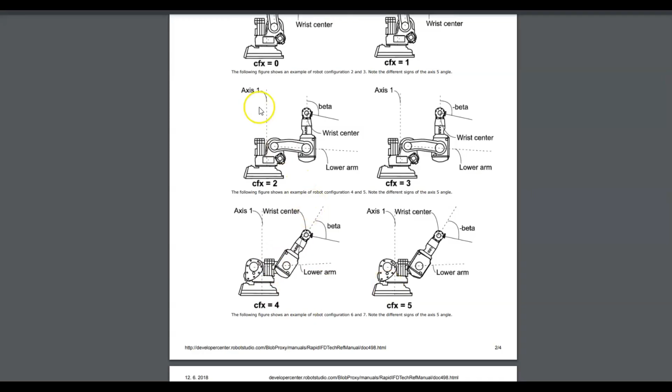So you'll typically see an FUT configuration, or if it's non-flip, an NUT configuration. Then on ABB robots you'll have CFX values for their configs—CFX 0, 1, 2, 3, 4, 5—giving different combinations. They put their configurations into different combinations of joint configurations for their configs. That's just an example of where robots can reach the same spot through these singularities and different configurations.

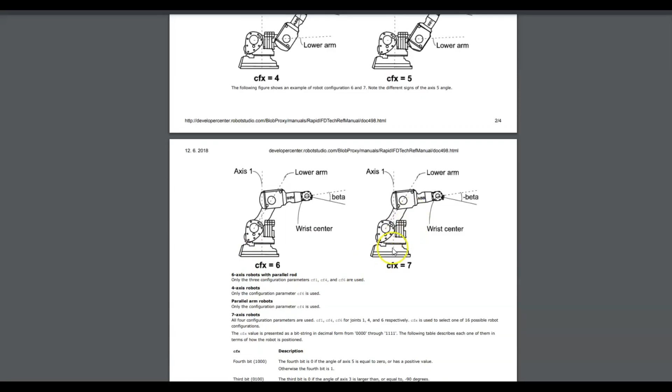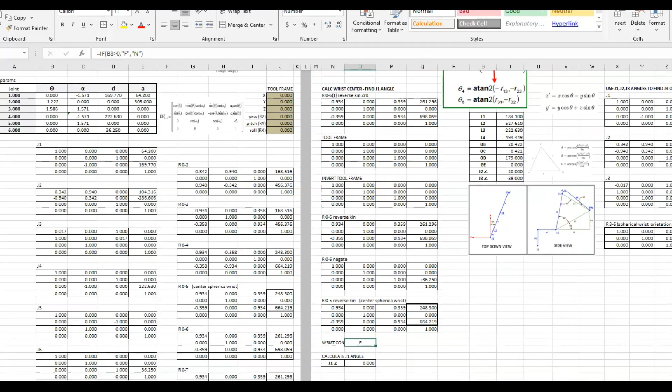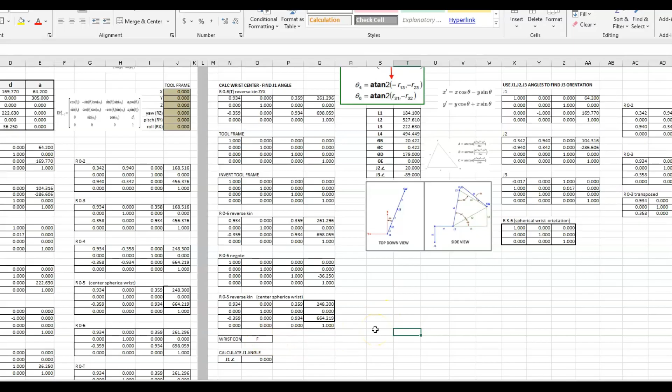So now going back to our spreadsheet, I have this wrist config cell here, and what this basically does is look at the actual joint value to see what J5 is, positive or negative. In a real robot controller, when you teach a position, it can look at the motor encoder or resolver and know which wrist config to apply when the position is taught. Then when it uses the kinematics to get back to that position, given just the Cartesian coordinates, it needs this configuration to know which side of the singularity to put the joint on.

So going back to our calculation for joint 5, it basically follows this center equation here, and looks at the configuration using a series of if-then statements. If the configuration is positive, it'll take R33 plus the square root of 1 minus R33. If the configuration is on the other side, it'll take R33 minus the square root of this formula to calculate the J5 angle.

Then the J4 and J6 calculations basically follow this formula: if J5 is positive, J4 equals A tan 2 of R13 and R23, and J6 equals A tan 2 of negative R31, R32—with the signs reversed otherwise. If J5 is a negative value, it'll use these calculations instead: negative R13, negative R23, and joint 6 will be A tan 2 of R31, negative R32.

So if we take a look at that, it's basically looking at our spherical wrist orientation and grabbing the A tan 2 of those two cells, and J6 uses A tan 2 with those two cells, while J5 is calculated off of that cell. That's pretty much it on how joints 4, 5, and 6 are calculated using this formula. I hope this helps people get a basic understanding of how robot kinematics are calculated, both forward and inverse. Let me know if you have any questions or spot any mistakes, and thanks for watching.